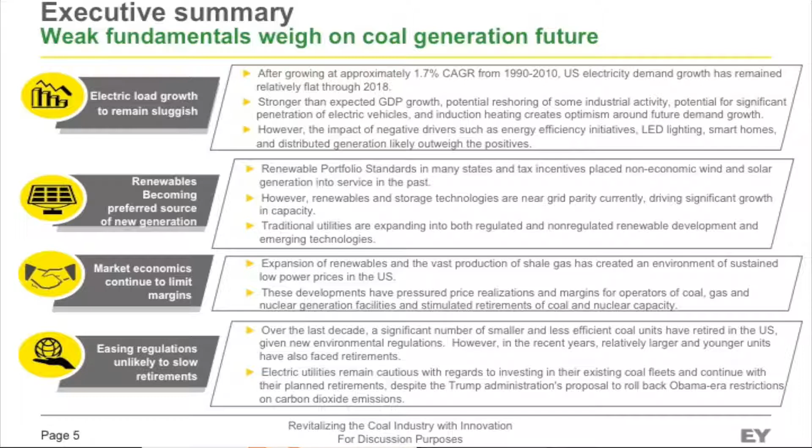And then last, certainly there has been an easing of regulations, but I'd say go back to the three factors, and in particular the desire of the customer to feel that they are getting a clean source of energy. So despite the easing of regulations, the industry knows they need to be best in class in terms of the source of power, whether it's generated from natural gas or coal—the ability to say this is clean, that we're complying not only with the minimum industry or regulatory standards, but a standard that the industry aspires to.

So I think those are more important factors. I think Rick will talk a little bit about where this administration stands on the regulatory scheme, but I think those are really important factors. So I'm going to zip through this a little bit—I think this helps set the stage for what we believe are the fundamentals.

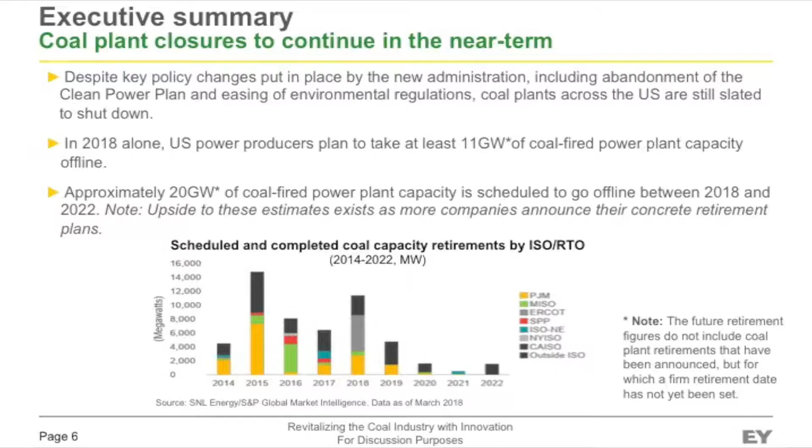This information I think you're going to send out, just a summary of the number of retirements, and you can see that there's a spike in 2018. There's still retirements on the horizon, and some of them, yes, were end of life retirements, but some of these plants can continue to operate and provide the energy mix that we need in the U.S.

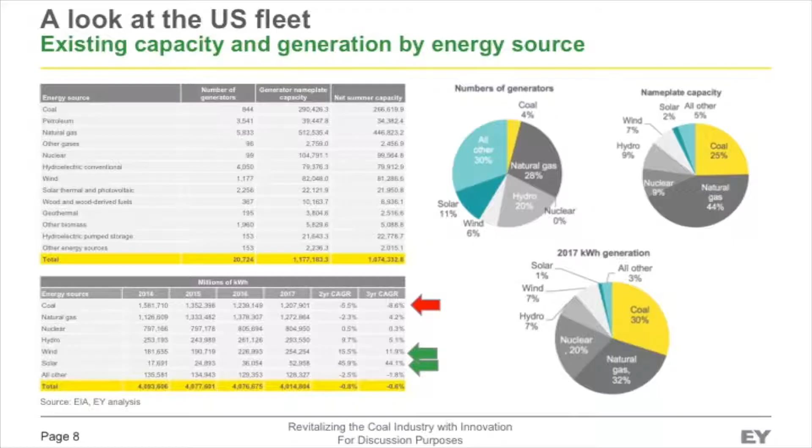Because the reality is, and this is something I'm going to flip to, coal still provides 30%. And while that's going to decline, it's not going to decline overnight. Solar and wind still only account for 8% of the power of the energy mix, and that's really important.

To make a huge leap to displace coal or natural gas or others, it's going to take scalable storage, and we're just not there yet. So even in the near term, the fact that we've reached cost parity on solar and wind does not mean we've reached the ability to scale to replace fossil fuels as a primary source of energy. It's very important to balance these two things and think about what technologies can be deployed to provide reliable and affordable power to the U.S.

So with that, I'm going to stop because I believe we want to have plenty of time for Rick to give his remarks. Thank you.

And then we've tried to be as flexible as we can. We know that there's a number of different nuances, a number of different business models in the U.S. industry right now with regards to power generation. And so we've tried to develop strategies that will allow us to tailor our relationship with each of the different power plant owners to fit their needs as well as to fit our needs.

So the three that we are really pushing are either a plant lease, where we will come in, take over complete control of the plant, lease it from the owner, run it ourselves, as well as during that period, build our FGD next to the existing one, and then bring it online and begin to realize the benefits that I've discussed.

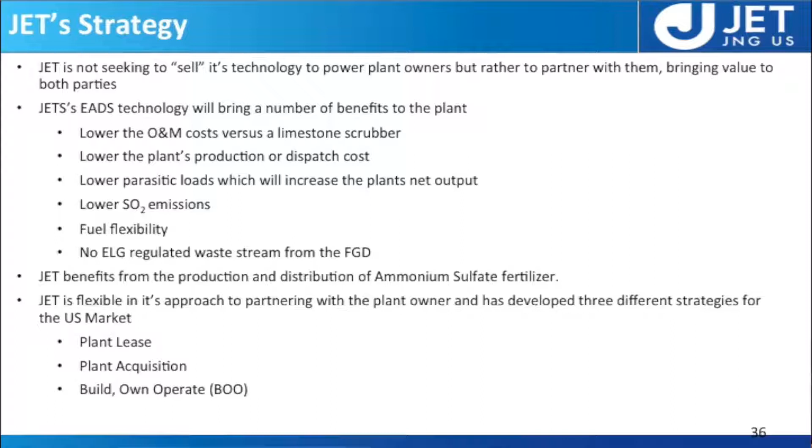Plant acquisition is fairly straightforward. I'll talk a little bit about that one, but that's, I think, probably one that most people are familiar with, is a pure M&A process. And then I think the one that's unique, at least in my experience this is unique, is our build, own, and operate, where the power plant owner continues to run his plant, he continues to run his existing FGD, and we build our ammonia-based scrubber alongside, and then we tie it in and begin to operate it.

We bear all capital costs and responsibility for distribution of the fertilizer and procurement of the ammonia. So that little island that's the scrubber would belong to JET and be operated by JET. But that's got to be a very coordinated arrangement, because when we don't run, you can't run, and vice versa. If we're not there for you, you can't run the plant. So we are very tied at the hip, so to speak, to make sure it's a win-win.

I won't spend a lot of time on this, it'll be in the materials we send out, but this is just a quick case study to give you some numbers to understand where we see the benefit. In this example, this is a 2-unit, 650 megawatt per unit plant, running at roughly a 69% capacity factor. If you crunch the numbers in here, that's actually a 68.5% capacity factor, so if you come up with a slightly different number, that's why.

But basically, in the table, we're trying to illustrate what a typical plant, a 1,300 megawatt plant, would be spending on limestone, and would be spending on power, even though typically it's just a house load, so most plants, at least in my experience, don't count that as a cost. And then your other utilities, as well as either disposal of some gypsum or very, very thin margins of the limestone.

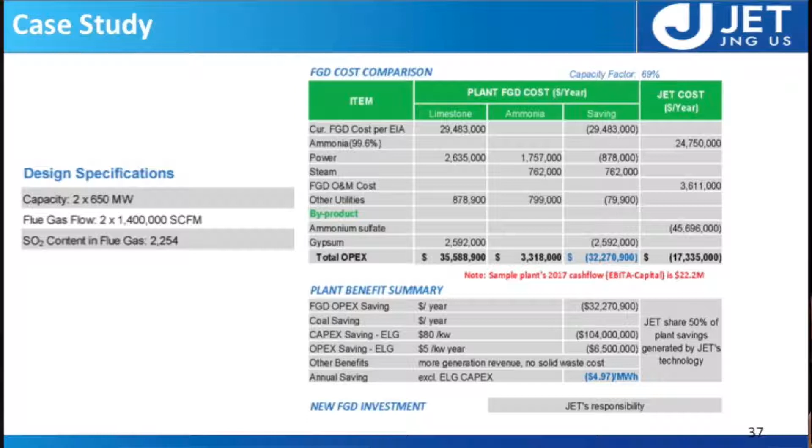Just down in the last box briefly, that $32.2 million is right from the upper table. The $104 million is just an estimate of what we believe a plant of this size would need to invest to meet ELG compliance. And then your other O&M savings, because you don't have limestone prep, you don't have conveyors, you don't have gypsum storage, you don't have mobile equipment, we estimate that at about $6.5 million. So if you take the FGD OPEX savings along with the ELG OPEX savings and divide that by the 68.5% capacity factor, it's roughly $4.97 per megawatt hour. That's a significant number for a plant of this size, but it's also very scalable.

So I'll run through each of the models quickly to try and get back on schedule. On our build, own, operate model, the BOO model that the chairman referred to, we're responsible for all EPC requirements. We would bring the equipment in, construct it, with little to no capital invested by the owner, and a very minimal tie-in outage, which we estimate at 3 to 4 weeks. Again, it's going to be site specific - how much land do you have, how much room do you have for us to build our technology?

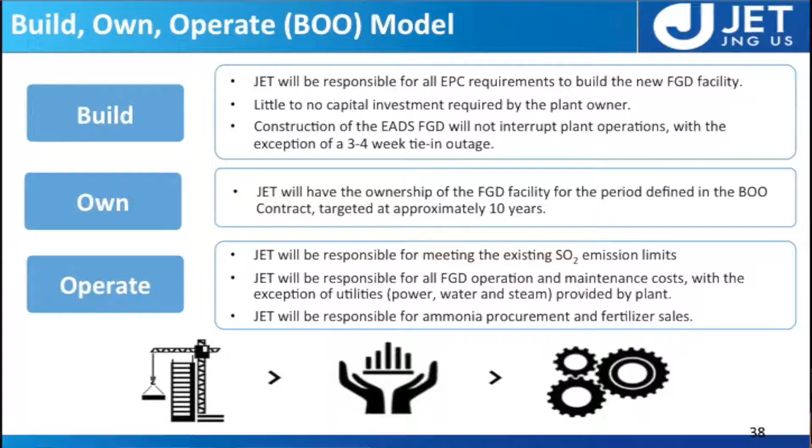And then we'll own and operate the FGD facility. Right now, based on information we've gathered through some of the plants we've signed NDA agreements with, we think somewhere around 10 years is a good starting point that allows us to recoup our investment, as well as gives the plant some certainty for 10 years. Beyond that, a lot of plants get a little uncomfortable making that commitment. We'll take the responsibility for meeting the existing SO2 emission limits, take over all FGD operation and maintenance costs, with the exception of those utilities I mentioned, and lastly, we'll handle all the ammonia procurement as well as the fertilizer sales.

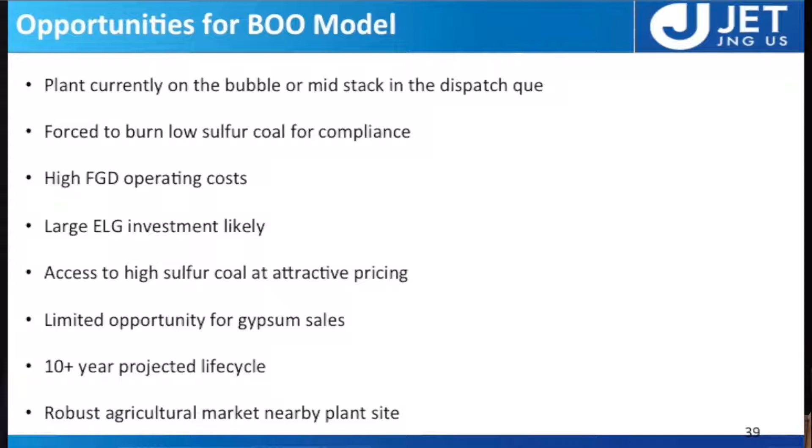So the perfect plant for us, or the plant we think would be an attractive model, would be someone who's on the bubble or mid-stack within your LMP, within your region. You're forced to burn low sulfur coal from the PRB for compliance, you have high FGD operating costs, maybe using lime for your FGD process, which is an extremely high cost sorbent. You have a large ELG investment looming, depending on federal or state regulations. Limited opportunity for gypsum sales, 10-year projected life cycle, and a robust agriculture market nearby.

As we start out, that helps us, but we anticipate as we grow, we'll be able to increase that distribution network, and that may not be as large a requirement as it would be as we first step out.

Under the plant lease, this one is a little bit more complex. Basically, we would enter into a lease agreement to run the plant, as well as build and operate the FGD. We would work with the owner to understand his forward plant revenues for the term of the lease, to compensate him for those revenues. We'd anticipate that within the first 2 years of operation, we'd have the FGD installed.

Similar to the BOO, we would take all responsibility for the fertilizer product. We anticipate significant cost savings as you move from that limestone base to the ammonia-based FGD, plus some of the other benefits we talked about in the earlier slide. A portion of those cost savings would be passed back under the lease agreement to the plant owner.

So, as I've talked about, we anticipate this improves the overall economics of the plant. Some aspects of the commercial arrangement may have to remain with the owner as we begin.

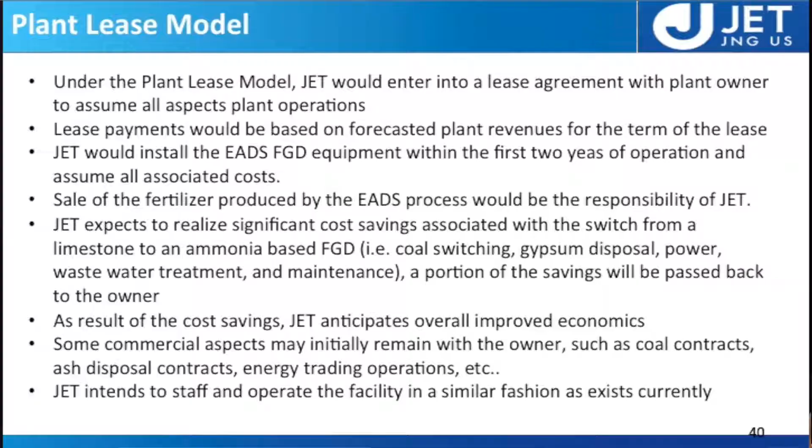If he has 3, 4, or 5 year coal contracts, good for 5, right Phil? Yeah, we may have to retain those coal contracts as we transition over, as well as figure out how we'd participate in the market - do we trade through the existing membership, whether it's in PJM, SPP, or MISO? We have to work through those logistics, so that may not be happening on day one as we transition.

And then we would staff and operate the facility in a similar manner as it currently exists. Some of the folks we've talked to have raised concern over union contracts and how that would be handled, and I think we can work with the owner either through an agreement or an O&M arrangement to transition to what we think is the optimal economics for the plant. We've also been asked, if I shut down the scrubber, that's a plant - 1,300 megawatts could be 50, 60 jobs, but we'll need people to run our scrubber as well. So again, working with the owner.

And then, if you have an owner who's uncomfortable with that 10-year commitment on the BOO, he's saying to himself, listen, I don't know if I can make it 10 years, I'm only comfortable with 3 or 4. If we can guarantee those revenues for the 10-year lease, that may bring him back to the table, or have him look at his plant in a different light. And as we mentioned earlier, the agricultural market.

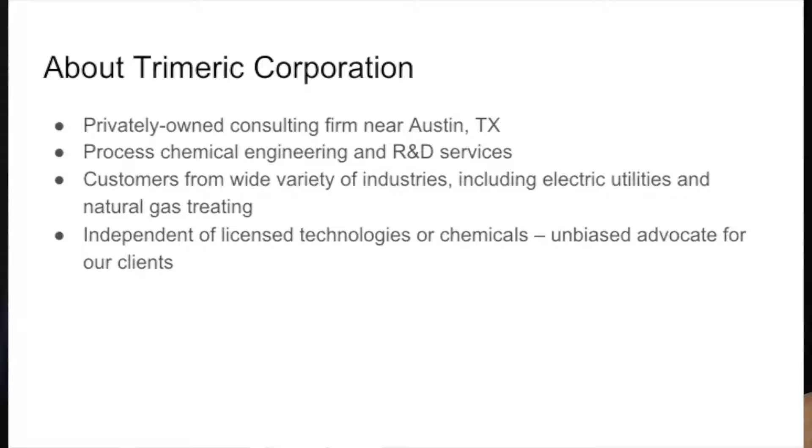Just real briefly about Trimeric Corporation, so you can understand how we fit into this. We're a privately owned consulting firm outside of Austin, Texas, consisting of 18 chemical process engineers who specialize in traditional chemical engineering services, but also in technology evaluation and its development and deployment into the marketplace. Our customers come from a wide variety of industries, including the electric utility industry and natural gas treating. And I think what's important and germane for this discussion is that we're independent of licensed technologies and chemicals. So our owners have made a conscious decision that they like doing process engineering consulting, and they want to be unbiased advocates for their clients.

So with that in mind, what we did was we were requested by a third party, not by JET, to evaluate ammonia-based scrubbing as an option for SO2 removal at an existing U.S. coal-fired power plant. At that plant, its existing scrubber was reaching its end of life and was also causing high yearly cost to operate. There are several advantages of an ammonia-based scrubber that our client wanted us to look at to see if that would be a potential avenue for them to look further into as an SO2 removal replacement technology.

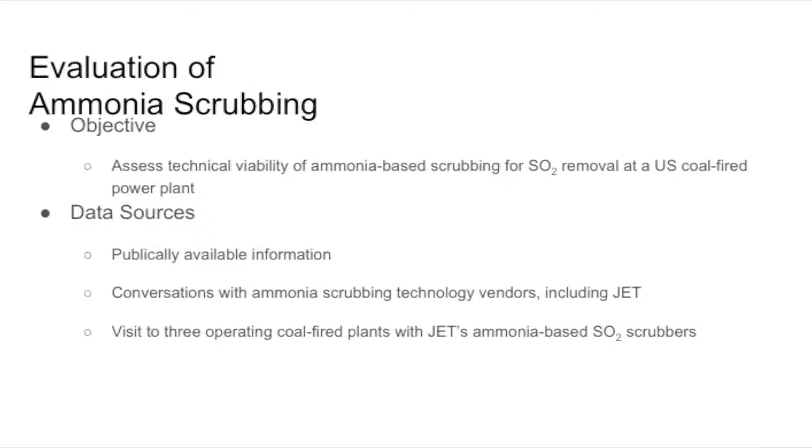We had three main sources of data for the study that we did. One was publicly available information that was in the public domain. Another was conversations with ammonia-based scrubbing technology vendors, one of those being JET. And then finally, went on a visit to China with JET to visit three coal-fired plants that were operating JET's SO2 technology.

The main focus of our study was looking at key performance criteria that would distinguish ammonia-based scrubbing for application at this U.S. plant. So first and foremost, it's got to meet the SO2 removal requirement that you need as a prerequisite. And what we were looking for is at least 98% removal of SO2. JET supplied to us performance test data from 3 different sites, coal-fired sites, showing that their technologies were able to achieve that and more.

We're also very much concerned about the production of a saleable fertilizer byproduct. It's important that the ammonium sulfate that you produce be saleable. And while I'm not a fertilizer expert and I can't talk about the fertilizer market, I am an expert on coal-fired power, having worked in it for 17 years and on scrubbing technologies. When you think about coal, you think about all the trace contaminants that come in with the coal. So a question that foremost comes to mind is, well, where do those contaminants, those metals, the metal oxides go? So I did a quick calculation looking at the coal composition for the plant in question, and then estimating how much of those metals would enter into the scrubber, and then made an assumption of a worst case that all of those get incorporated into the fertilizer product. And then I had an example specification for a fertilizer product, an ammonium sulfate product. In the case of the coal specification I looked at, I predicted that the trace contaminants would be below the maximum allowable levels for that fertilizer spec. So at least on first blush, it looks very promising from that perspective. Whether it's actually saleable on the market needs further study, and that's a market-based decision. That was outside the purview of my study.

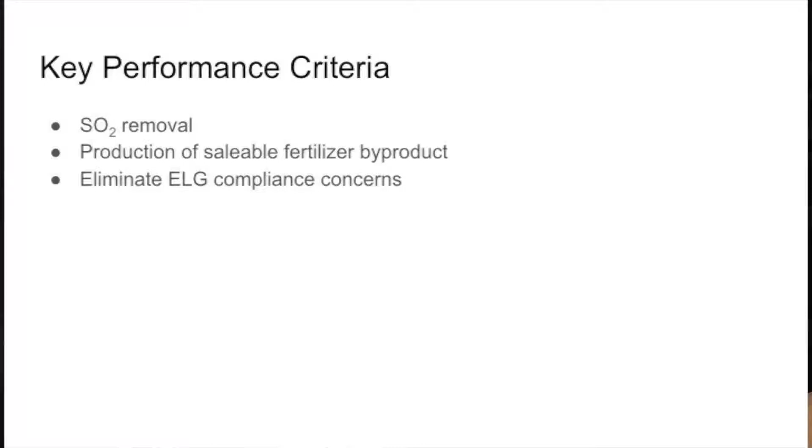And then the other third key performance criteria that we were concerned with was the ability of an ammonia-based scrubber to eliminate ELG compliance concerns. With traditional wet-based scrubbing, you often have a purge stream, and the chairman mentioned this, that has to get treated for wastewater compliance with the effluent limitation guidelines. That purge stream comes about because there's chloride in the coal, and you need to limit chloride concentrations in order to prevent corrosion. Well, the advantage of an ammonia-based scrubber is that chloride then gets incorporated into the ammonium sulfate product. So you're not generating a water stream to purge those chlorides; it's now being incorporated into the product. Both of the vendors that we talked to, including JET, looked at the coal specifications and the unit specifications for the unit in question. And they both came to the conclusion that, yes, an ammonia-based scrubber could eliminate the ELG compliance concerns for that plant.

Finally, we looked at a few other technical aspects of ammonia-based scrubbing.

One would be process availability and reliability. I wasn't provided quantitative data to assess this, but both vendors told me they felt their process was as reliable or more reliable than a limestone-based scrubber, and that technology is already quite reliable these days.

On my visit to China, I talked to three different FGD engineers at three different facilities, and each indicated they were able to operate between maintenance outages anywhere from 6 to 24 months without having to go offline to maintain the ammonia-based scrubber. So that scrubber was available for them and never caused concern about going on an outage.

Finally, we looked at the technology's effect on other air emissions. The technology is there to remove SO2, but you don't want it to impede progress in removing the other emissions you need to remove.

In terms of CO2, it's neutral—there's no CO2 formed by the process itself, unlike limestone scrubbing. JET provided data for NOx emissions, showing no negative effect on NOx emissions.

For ammonia, we heard from the chairman about their challenges and how they've advanced the JET technology to remove ammonia emissions. Both vendors I talked to were able to limit their emissions to less than 5 or 10 ppm in the stack.

For HCl, likewise, I was provided data by one of the vendors showing over 99% HCl removal, so that's good. There are two areas of concern where further engineering studies are needed for a good engineered system, and one would be particulate matter.

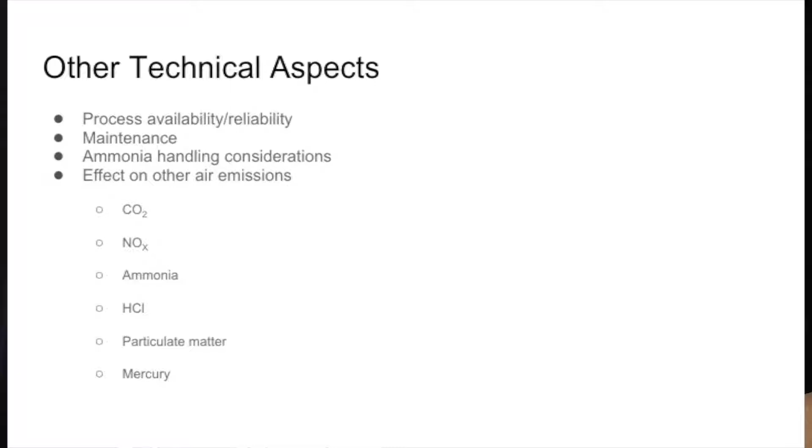This relates to the aerosol issue the chairman brought up, and he's deployed a technology to deal with that. But it means you have to look at each specific plant and its inlet sulfuric acid concentrations, and really make sure you're making a good engineering decision about how you deal with sulfuric acid and its reaction within the ammonia scrubber, making sure you've well controlled those fine particulate emissions.

The final point is on the mercury front—there are mercury regulations here in the US, whereas ammonia-based scrubbers are deployed mostly outside the US where there are no mercury regulations. So right now we don't have data on mercury behavior within the ammonia-based scrubber to make a judgment about how that's going to work.

An interim solution would be to remove mercury upstream of the scrubber so that the scrubber doesn't come into play with meeting mercury regulations. But I do think having a good set of robust mercury data for the ammonia scrubber is something that's going to be needed for widespread deployment of this technology in the U.S.

So in summary, we found that through all the aspects we looked at, this was a technology worth continuing to pursue and doing a detailed engineering study on, to understand how it would be deployed at the plant we were at.

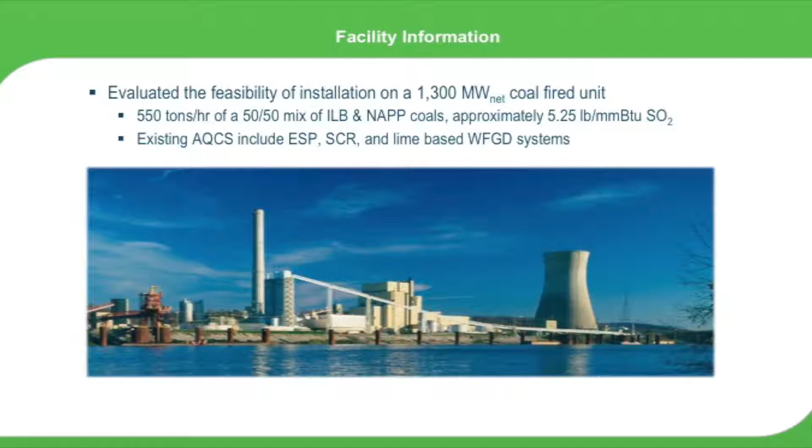Typically running on a high-end spectrum with sulfur levels around 5 and a quarter, but up to 7 pounds per million BTU at times, depending on what blend is coming in. So fairly challenging. The station was built originally with an electrostatic precipitator and a lime-based FGD system, and later retrofitted with SCR technologies for NOx control. Big important point here is that lime-based system.

Zimmer came online in 1991. It's on the newer end of a lot of large generators out there. Should have a lot of life in it, should be very cost effective, but the reality is those lime-based scrubbers are very expensive to operate. That lime-based scrubber made up over 30% of our non-fuel O&M expenses at that station, in the range of $25 to $30 million a year associated with scrubbing to remove the SO2 at that site. That made over $2.25 impact to our VOM.

Which made a big impact to how we dispatched the unit. It didn't used to make a big deal when the unit was regulated and coal-fired generation was the norm, but in the market today that's a huge impact, and it really impacts the viability of that site. So we spent years looking at different options to improve the viability of the site. A lot of it centered around, can we improve the process, reduce our usage of the lime, and then look into limestone conversions. The trick is those limestone conversions are fairly expensive. Your byproduct is essentially the same.

We were fortunate that we made saleable gypsum, so rather than having to landfill the majority of it, it did get sold, but the value of that byproduct is fairly low compared to the cost of scrubbing. So in early 2017, I got an unsolicited email from somebody within the JET team, and it hit all the buttons we were looking at - could we help you, no cost to you, to improve your operations. Like, perfect, that's what we need. So that's how we undertook this effort.

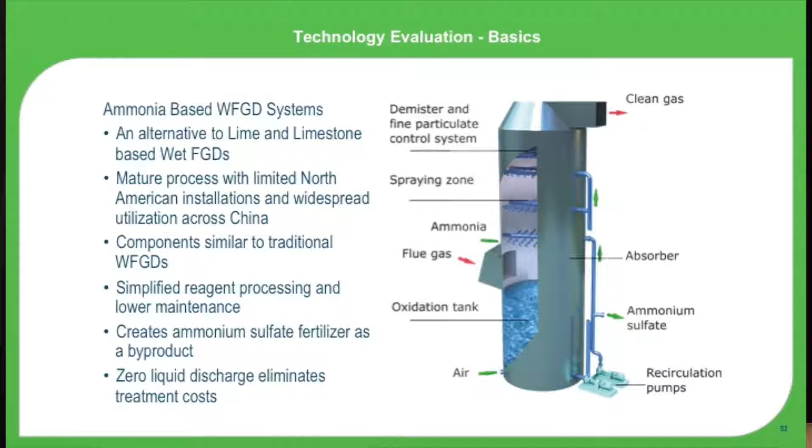So the biggest thing that has been pointed out is the value of ammonium sulfate on a density level is really high. I'll show you a slide that really brings it home, but the value is high enough that you could transport it long distances to find a customer and still be profitable compared to gypsum, where if you have to drive it more than 50 miles or so, it starts to be too expensive to make it worth doing, and you're better off landfilling. So you're just adding to your expenses to operate.

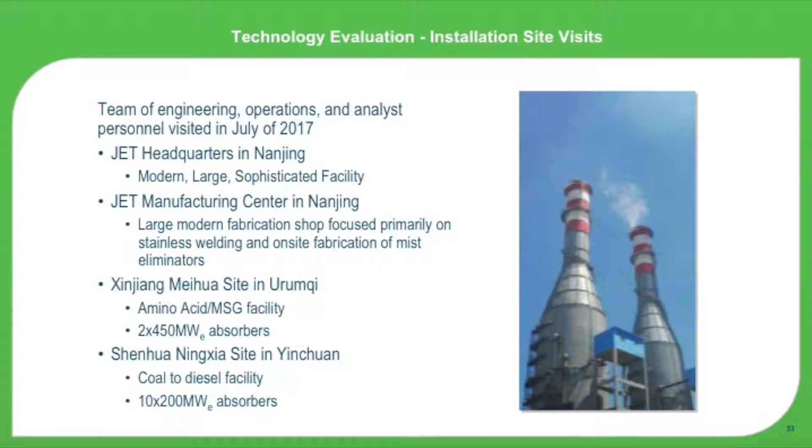So after looking at that, we decided it was worth doing a site visit. We went to China as well. We brought a team of subject matter experts for FGD systems, engineers, process folks, and an analyst from our company who happened to be a native Chinese speaker, which helped us a little bit there. We visited the headquarters. Not much to talk about there, but it is a very nice, modern, large facility, well-staffed. Their manufacturing center in Nanjing is a very nice fabrication facility.

I think they had something along the lines of 22 jobs going through the facility at the time. Now those are varying size - we liken it to about 2 or 3 times the size of our facility. But new equipment, modern welding equipment, looked good. And then we saw 2 facilities. One was a 2 by 450 megawatt equivalent facility that actually made amino acids using MSG manufacturing.

We were really interested in that site because the modules were about the size we would need to install at our site - we'd just need 3 of them instead of 2. And then we got to see this coal-to-diesel facility that had over 10 200-megawatt units, as well as dozens of others throughout the facility. I've never seen a facility that large in my life.

It was reassuring to see that it wasn't just the 10 that we looked at with the JET guys, but there was at least another dozen within that facility. Not only were they there, they were in the process of improving those sites. They started off with a lot of Gen 3 modules, as Chairman indicated, and transitioned several of them to Gen 4s. We were able to witness back-to-back comparisons between Gen 3 and Gen 4.

The impacts on the plume - one of the big concerns for our facility is acid aerosols, as Katherine pointed out. The difference that Gen 4 made was very clear to us, that it's a technology that needs to be pursued here. It's exactly what we need. We spend a lot of money at these facilities to mitigate acid aerosols, and it looks like it does it very well. Short story: technology is functional, feasible. It does what you need it to do.

The biggest area of concern we have here - sorry about that - material handling is going to be one of the biggest issues, especially at a site that makes 1,300 megawatts worth of this fertilizer. The volume of trucking would be astronomical through our site, but we believe that's one of the reasons our site was really a favorable spot to put it in, since we have river access.

This stuff is very capable of being barged, and as I indicated a few moments ago, this product is high enough in value that you could barge it and ship it all around the nation and internationally if needed to find a market. It has that much value to it. You would never do that with gypsum - you would never put it in a barge and send it to another country. It just isn't worth that much.

We did have a few other concerns. The ammonia storage - that's a new one. We use ammonia on demand at that facility, so this would be a whole new endeavor. Plus, you're talking volumes of ammonia that are kind of unheard of right now at coal-fired power generation facilities, so there'd be some learning opportunities that have to be done there.

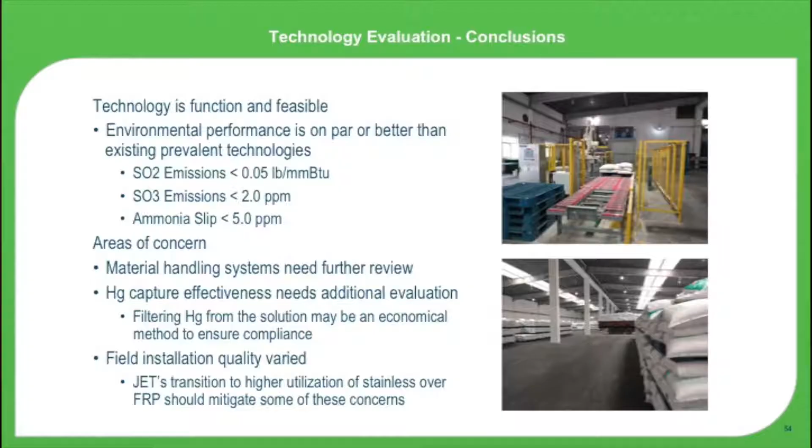The permitting is a bit of an unknown - we just need to know we need to allocate time to do so. The quality of the work being done in their shop looked very good. Some of the field installation where they did handmade fiberglass reinforced plastic products left some areas to be desired, but JET's been transitioning over to more stainless materials in their process, and it alleviates a lot of that concern. A U.S.-based workforce for installation here would take care of the rest.

So we looked at: can we fit it in our site? We're fortunate enough that there's some space in our site. We could build it to the side while the unit's in operation and do a short tie-in outage. It also allows us time to vet the equipment without being time pressured.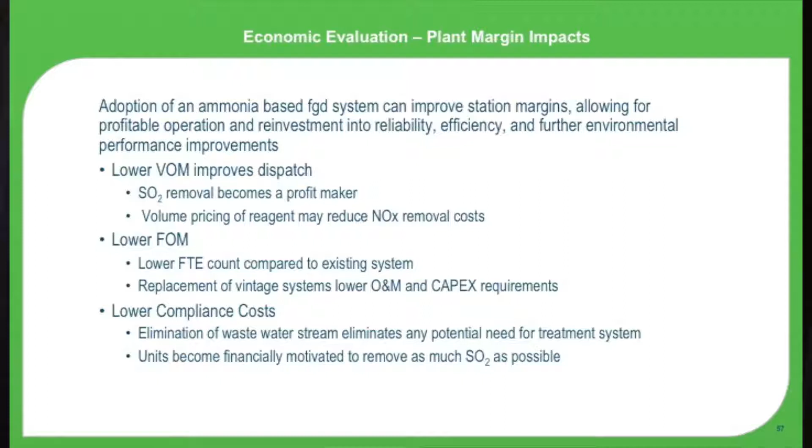You also get some benefits if you have SCRs — you could probably leverage your supply and drop your cost of SCR operation as well. And for fixed O&M, this process pumps liquids around, whereas traditional FGDs pump a slurry, much thicker, much more abrasive, which wears the equipment out a lot faster. This is a very maintenance-intensive process in most FGD systems in this country. With ammonia, the liquids are very easy to move around, so your capital cost to maintain things and your yearly operational costs will drop significantly.

Plus, in our case, we're removing a system that's been in service for 25 years under pretty harsh service. So you're resetting that — not only is it lower cost to operate on a year-by-year comparison, you're also comparing yourself to a 25-year-old piece of equipment versus a brand new piece of equipment. That's a big change as well.

Then there's the lower compliance cost we talked about with the ELG. This station's estimate for ELG ran on the low side and was very optimistic at $35 million, but more realistically up to $75 million. That is not an investment that's going to happen, not in a merchant generation area. I'm sorry to say it, but most coal-fired generators won't put that kind of money into their plants — they will retire before they invest that.

These plants are running so tight on their margins you're lucky to make $5 to $10 million a year. You barely have enough money to pay for turbine overhauls when they come due. So basically your unit's viable up until the next major overhaul. A change like this, at this particular station, could shift you from a $5 to $10 million margin on a good year to 20 to 25 million — now you can afford to reinvest into the plant, improve its efficiency, which improves all the emission characteristics, and reinvest in its longevity.

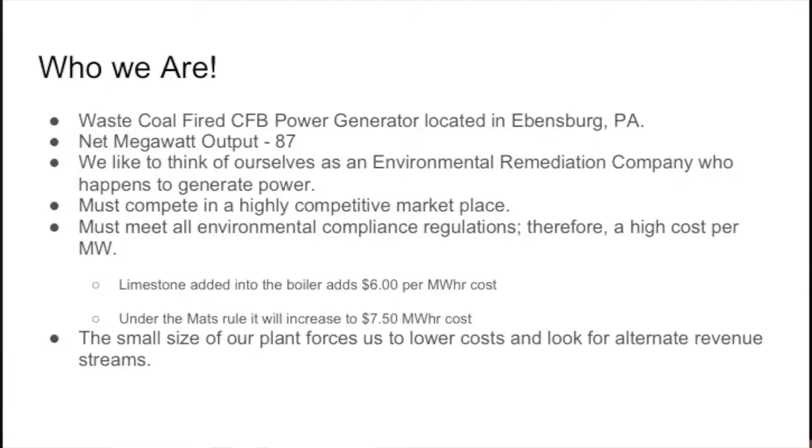Being only 87 megawatts, our variable costs—we add limestone directly. Unlike having a dry or wet scrubber in the back end, we inject our limestone directly into the boiler, and it can be, on average, 40,000 pounds per hour, 20 tons, injected 24/7. That adds up at that small economy of scale of 87 megawatts to quite a big cost, $6, $7.50 under MATS. The small size of our plant forces us to lower costs and look for alternate revenue streams.

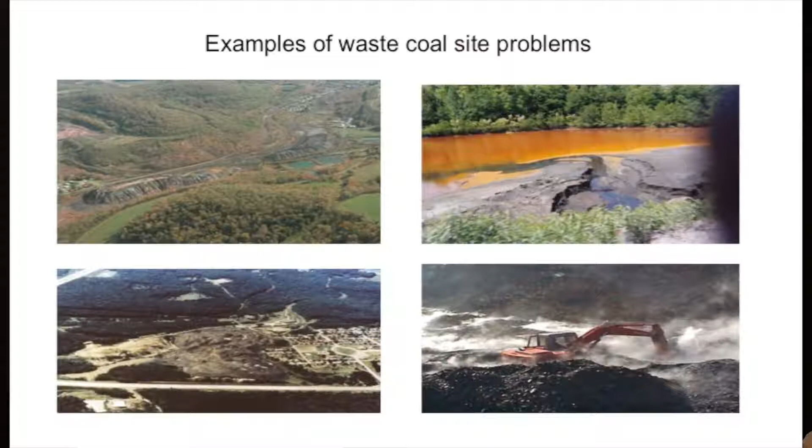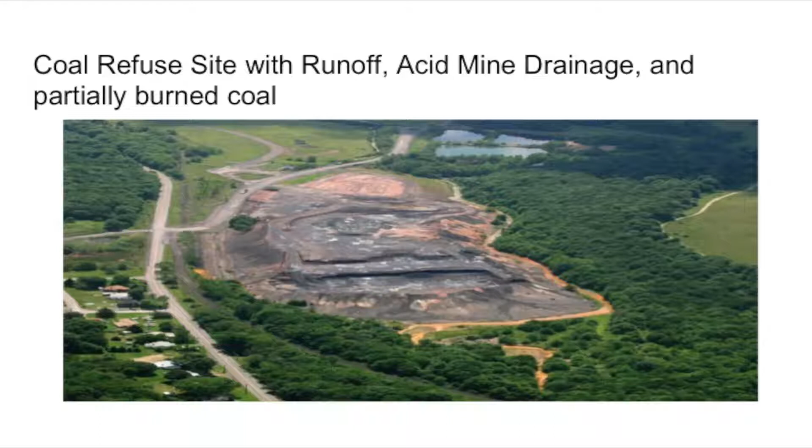Before and after waste coal. What is waste coal? It's the waste. In Pennsylvania, it's estimated there's over 1 billion tons of this waste coal just in Pennsylvania. Right now in the United States there are 15 waste coal burning facilities, most of them in Pennsylvania, and we're remediating these hazards basically at no cost to the taxpayers—who don't have enough money, certainly in Pennsylvania, to pay for over 1 billion tons of waste coal.

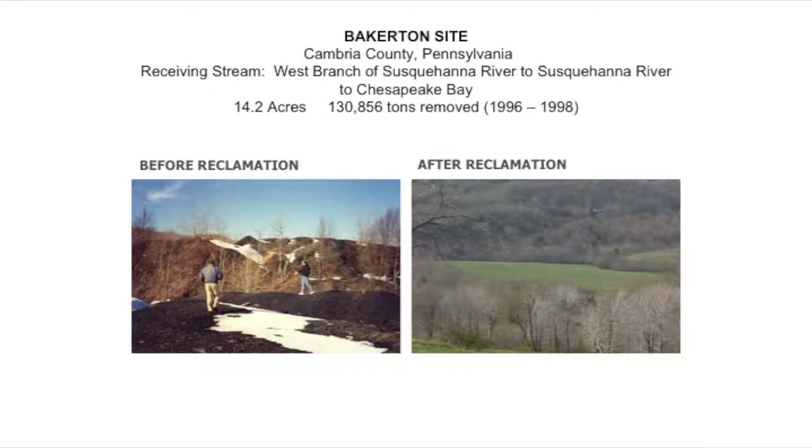So here's one of our old sites. Left was the waste coal site. The right is after reclamation—fully seeded, topsoil seeded, vegetation and wildlife growing. Another one, before and after: on the left is the waste coal site, the right is after it's been mined and processed.

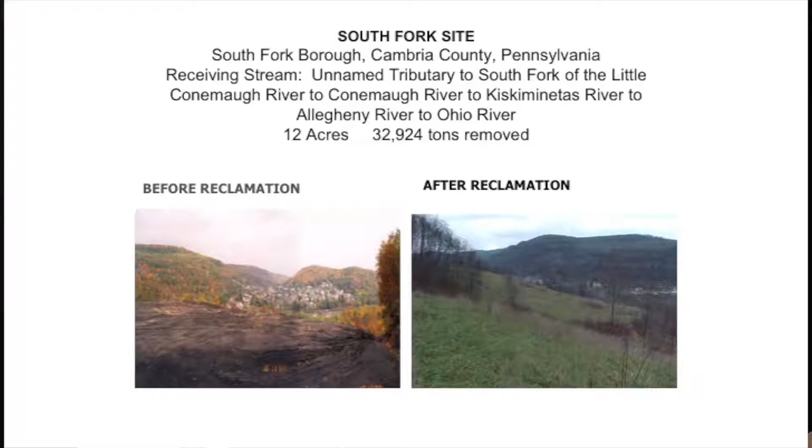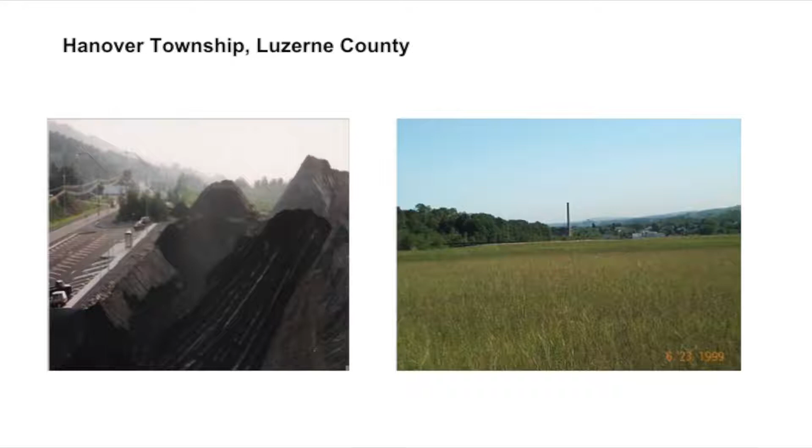Cambria's expectations for this technology: absolutely, potential to lower our operating costs and improve the plant's economic viability. We wanted to create a co-product or partnership with JET to create a co-product that could be marketed to assist in the economics of our plant.

We wanted to provide an alternate approach to environmental compliance relative to air quality: reduce SO2 emissions even beyond the high standards we have now, reduction in CO2 emissions associated with not having to add limestone into the process for SO2 control, a reduction in NOx emissions—again from not having the limestone in, a catalyst elimination—and reductions in filterable and condensable particulate matter.

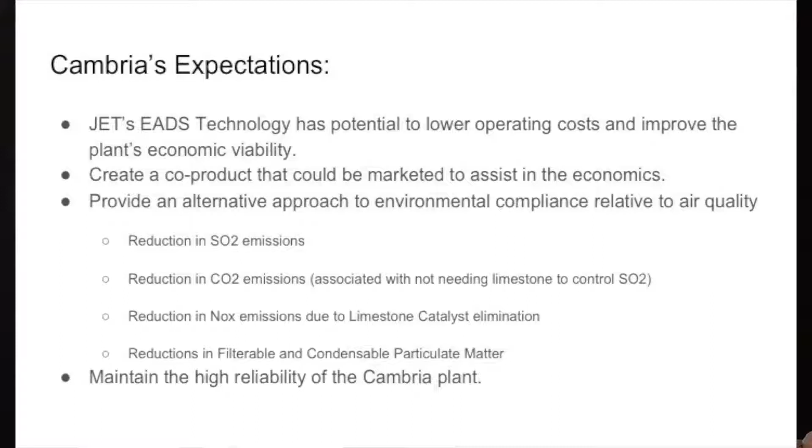And we wanted to maintain the high reliability of the Cambria plant. Cambria runs about 97% reliability on average—it's a very well-run plant.

So the operational issues we wanted to investigate during the China trip: would the JET technology meet the emissions number it advertised? What was the reliability of the back-end technology? Would the Cambria plant CFB technology flue gas meet JET's requirements? What was the corrosion potential? We had talked about corrosion potential in the absorber and the flue gas ductwork.

What was their outage schedule? What was the duration of their outage? Would it meet our needs? We certainly didn't want it to be less reliable. We didn't want their outages to be longer than ours. We wanted everything timed together.

It takes a large volume of bulk anhydrous ammonia. We had concerns about that. What was the fertilizer plant reliability? What was the potential for ash sales?

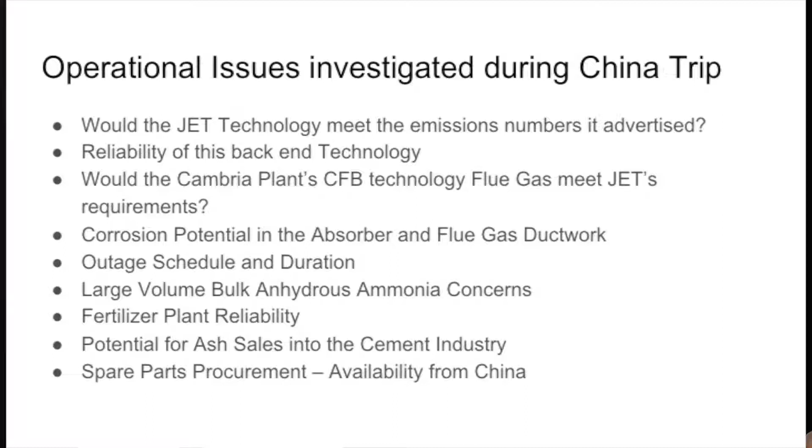Right now, because we add the limestone calcium into our process, our ash cannot be used like some PC plants' ash can be used as a product in the cement industry. PC plants get a revenue stream from selling their ash into the cement industry, which is becoming harder and harder for cement plants to get. So that would help improve our ash sales in the cement industry for another side revenue stream.

What was the spare parts availability? If it's being built in China, or most of it designed in China, do we have to get the parts from China? So the observations: JET technology can meet the emissions number they are proposing.

Katherine talked about that. Plants that have JET's previous generation technology are upgrading or building new to fourth generation. They wouldn't be doing that if they weren't happy with the technology—they would go elsewhere. And we asked many questions on that aspect. Outages can be stretched every 2 years and only be a week in duration. That meets our needs, so that was a check mark.

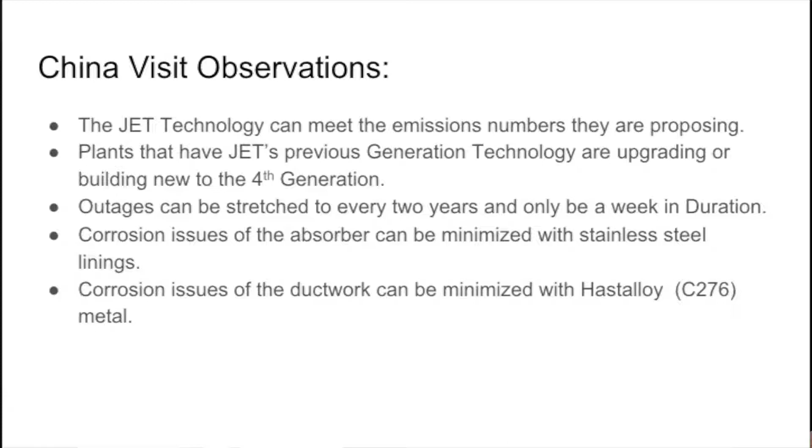Corrosion issues in the absorber can be minimized with stainless steel linings—that's good, so we're going to have that reliability. Corrosion issues of the ductwork can be minimized with Hastelloy C276 metal. Again, check mark—that'll help us in reliability.

The China plants with CFB technology like ours are now able to market their ash into the cement industry. They, likewise, couldn't market into the cement industry before, but now can. So that exactly parallels what we're looking for.

The high volumes of anhydrous ammonia have not been a concern. They and the plants have designed multiple tanks to transfer back and forth if one tank has an issue, so there's a little bit of extra capacity and redundancy there.

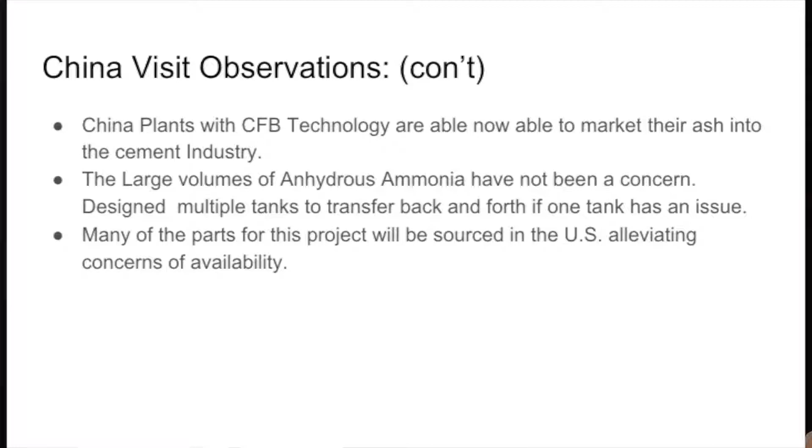And many of the parts of this project—correct me if I'm wrong here, Peter—will be sourced in the U.S., alleviating concerns of availability. So it was a very worthwhile trip. We kicked the tires—Deborah, Gary, and I—and I can say from my perspective, we were pleased.

Okay, so our next presenter is Mr. Fareed Salim, the CEO of JNG Middle East, and he's going to be talking about the applications of JET's technology in the oil and gas, agricultural development, and environmental protection industries in the Middle East.

Good morning. I guess I'm standing between you and lunch now, so maybe Neil will do that.

I will try to be short since a lot of the points have actually been covered by several of the speakers who preceded me. So I'm going to skip through probably some of the technology sides. But I'll start maybe with the story of meeting the chairman, which happened about a year ago.

One of the things that struck me quickly, having been associated during the last part of my career with ConocoPhillips in one of the largest sour gas projects in the world—I know I'm speaking to a different audience here, but this is a facility that basically processes gas which has about 25% H2S. It's hard to imagine. So when we came across that project, the more we looked at it, I said this is a sulfur project, this is not a gas project, which is reality. So out of the $10 billion investment, I would say 80% of that was really to economically remove sulfur.

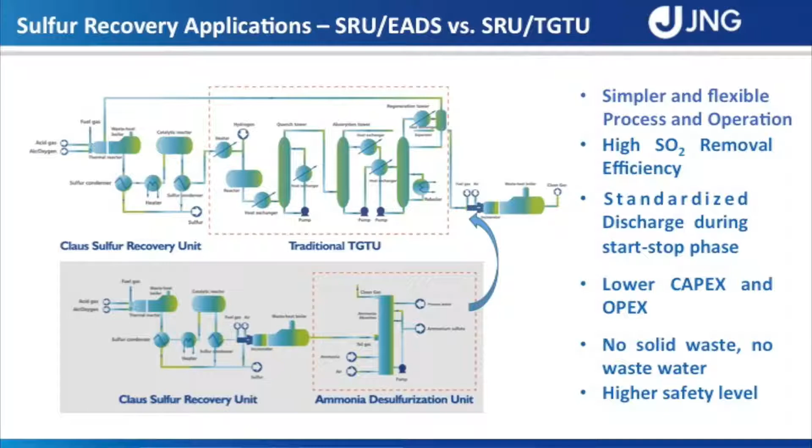Many of the gas streams and basically crude, whether it's being used in refineries, have sulfur, and somehow you're going to have to remove that sulfur. Traditionally in gas, you have a Claus unit which removes practically 99%, or if you go to super Claus, even more of the sulfur. To meet the emissions we are talking about, you have to install what we call a tail gas treatment, which is an amine-based process, very expensive both in CapEx and OpEx. Fundamentally, this technology replaces this tail gas treatment.

More important, since you are producing a value-added product here, and I think for people who come from an emissions background, when you think of these projects, you think of cost. So one of the first things I've been telling people in the industry is we're not talking costs here, we're talking making money. That's a fundamental cultural shift in terms of how we approach these projects.

So in reality, we're beginning to look at applying this technology in a very innovative way, simplifying the sulfur recovery process, because now we don't have to go to super Claus. Fundamentally, we want to maximize this value-added product, the ammonium sulfate, and we want to have more emissions in this particular case, to produce more value, because that enhances the economics of these projects.

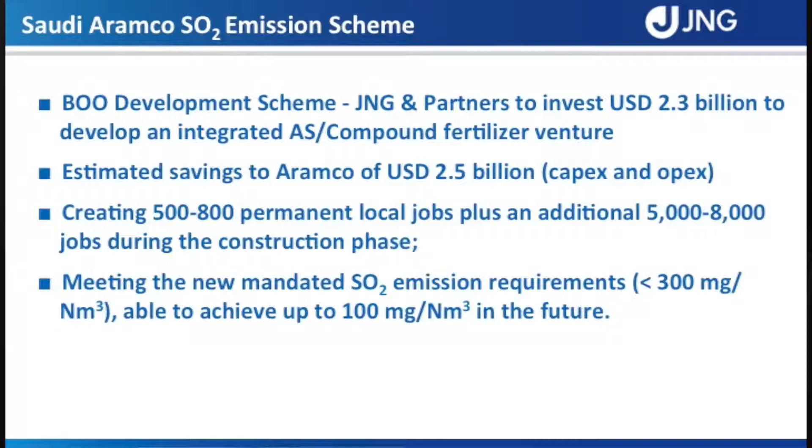So I'm going to skip through the technical piece here and all of the references, since you have seen this, and really talk about this Saudi Aramco first project, which involves 3 of their gas processing facilities, these are large facilities, and the scheme we have developed, and we are actively engaged now in commercial discussions with them, involves us building the whole complex, including the ammonia, the compound fertilizer, and clearly the absorbers.

This is an investment of around 2 to 2.5 billion. So our best estimate right now is about 2.3 billion dollars to do these 3 gas plants plus 1 small refinery unit.

Fundamentally, we would become through this venture a large fertilizer player. We would produce about 3 million tons of compound fertilizer, which is really using urea and our ammonium sulfate plus other products to produce this higher value-added product.

Clearly, this is new, the way at least Saudi Aramco is looking at this. This creates a new business basically within the kingdom, not only creating jobs. So now we're transforming this emissions, I would call it a cost question, into a new venture, which is really adding value in a broader sense within the kingdom.

So the gas plants, this is just a quick summary here of what the scope of this project involves, and which is incorporated in our proposal to them. As I said, it involves 3 of their largest gas processing facilities and 1 large refinery. We have several units here, and 3 large, I'd call them world-scale ammonia plants, which are built to serve the requirements in this particular case.

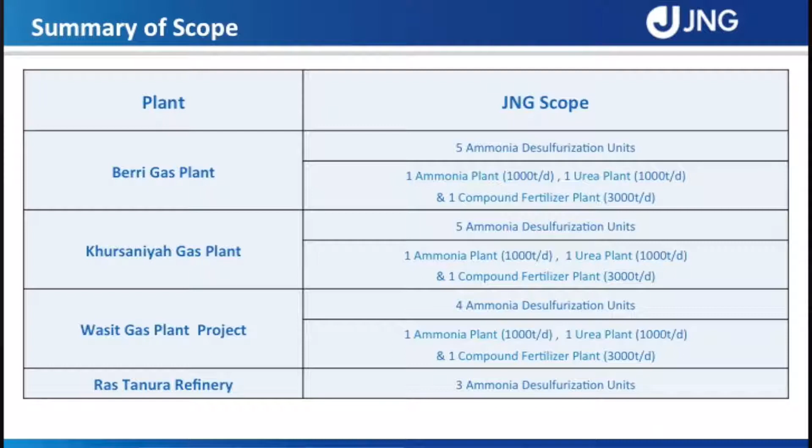Going back to ADNOC, the project I was personally involved in developing is one of the largest sour gas projects in the world, the Shah sour gas project. We looked at this clearly because we installed the sour gas treatment unit to meet global standards for emissions, unlike several of ADNOC's other facilities and gas processing plants which don't have sour gas treatment units.

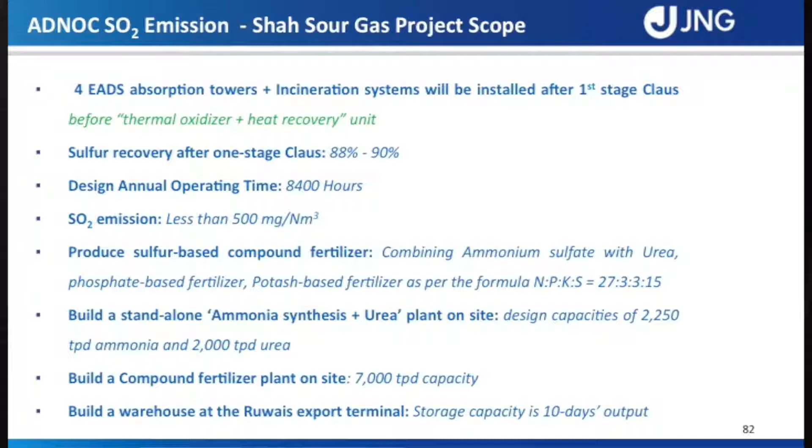When we did the study for them, it became obvious this is not a cost equation, it's about making money. Now we've expanded the scope of the study to include all of their gas processing facilities and a new sour gas development. For those not from the industry, Abu Dhabi has one of the largest sour gas reserves in the world.

To meet their future gas requirements, this is more of a strategic technology for Abu Dhabi given the country's needs. It would be a strong enabler if they can reduce the cost of developing these sour gas reserves, because as I said, in a project like Shah, 80% of your cost is associated with removing sulfur. In Shah's case that was affordable because the gas was liquid rich, but many of their other reserves are not as liquid rich, and technology like ours plays a big role in enabling development of these reserves.

Putting this into perspective, the scheme we are in discussion with ADNOC on right now — and ADNOC is in the fertilizer business, unlike Saudi Aramco — would produce almost 5 million tons of ammonium sulfate if you combine all their facilities. So this would be an even bigger venture compared to the one with Saudi Aramco.

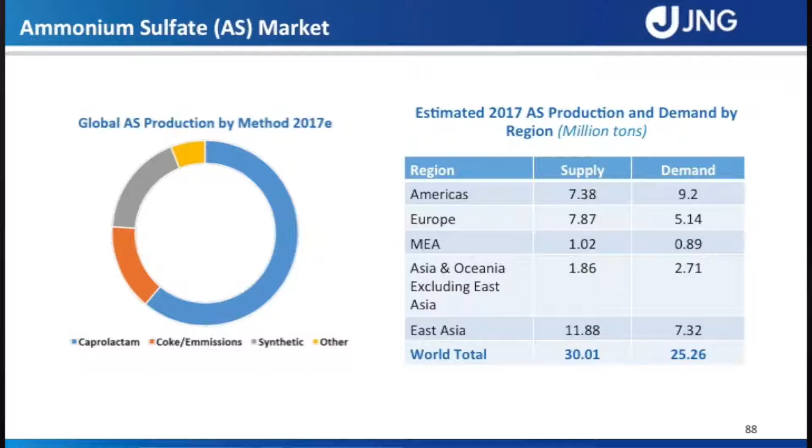So our ability, as one of the lowest cost producers of this product, to move it into the global market is not an issue. When we think of the broader fertilizer market, about 600 million tons a year, we're still talking about a tiny drop in that bigger, globally growing market.

Clearly the price difference between North America and other markets is driven by the type of crops grown and the soil being dealt with, based on what I've learned here. So there's a big market, at least in North America, for ammonium sulfate. And globally, I believe the need for sulfur-based compound fertilizers is growing very fast and will continue to grow.

So I think from a market fundamental point of view, we feel fairly confident that the products which we are producing and will continue to produce, especially as you begin to unlock some of the opportunities in the oil and gas industries, which tend to be much larger than the opportunities we have to look at. These holistic solutions deliver what I call a total solution to our customers, allowing us to deliver value to them and to other clients. And I feel personally, I'm sure you've seen enough data right now to say that there is enough value here for everyone.